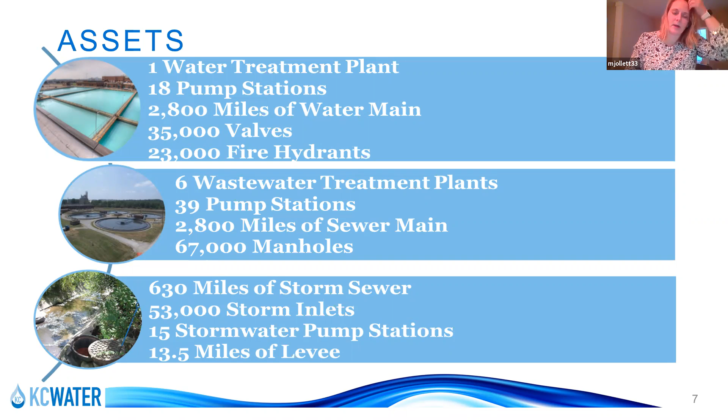I want to give a brief overview of our water main replacement program, since this project we're discussing tonight is part of it. We have more than 2,800 miles of drinking water infrastructure, and some of those pipes date back to the late 1800s, consisting of older materials like cast iron pipe. This aging infrastructure typically leads to a lot of breaks, which is a nationwide challenge most utilities are facing.

About 7 years ago, Kansas City Water implemented this water main replacement program. The goal is to replace 1% of our distribution system per year, which equates to about 28 miles replaced annually. Since the start of the program 7 years ago, we've replaced more than 200 miles. This summer in July, we replaced our 200th mile, and we've installed more pipe since then.

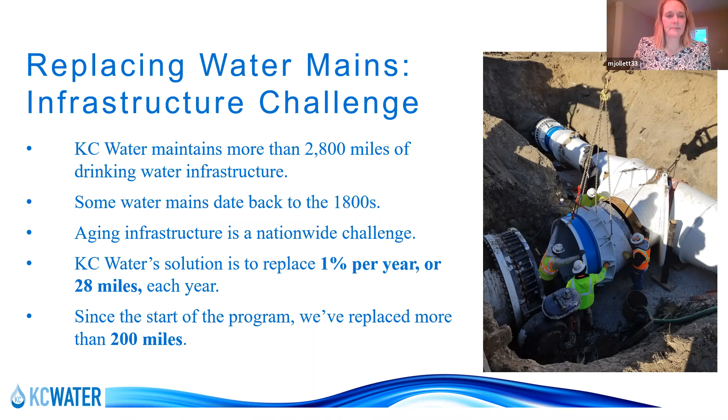So how do we choose which mains to replace throughout the city? We've developed a data-driven asset management method to evaluate our water mains and establish risks to them. Kansas City Water recently purchased software called Info Asset Planner that works with our GIS system, allowing us to evaluate the probability, likelihood, and consequence of failure. This creates a risk profile for each main.

What we do is run all the pipes through this program, excluding recently replaced ones, and calculate a risk for each pipe. The highest risk pipes make up the first 28 miles each year. This is done annually, every fiscal year, and those top 28 miles are identified as high risk mains that get developed into projects.

We also coordinate with other ongoing projects, like pavement or sewer projects elsewhere in the city, so we can tag on geographically to make sure we're only disturbing one area of the city at a time for these multiple projects.

For new projects, we design all of our new water mains to be zinc-coated ductile iron pipe, meaning they have about a 100-year design life. So the idea is that in 100 years, the new pipe should last 100 years, and we'll have replaced all of our aging infrastructure through this water main replacement program, at which point we can evaluate whether we need to renew the program.

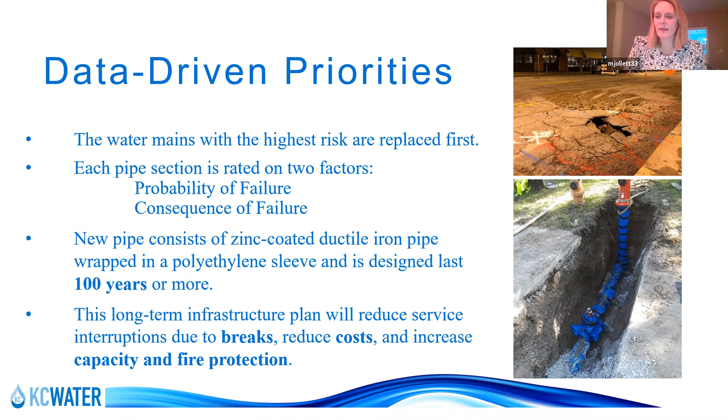And I think that's my last slide. With that, I'm going to turn this over to Terry Thomas, our project manager, and he'll go into details specifically on this project.

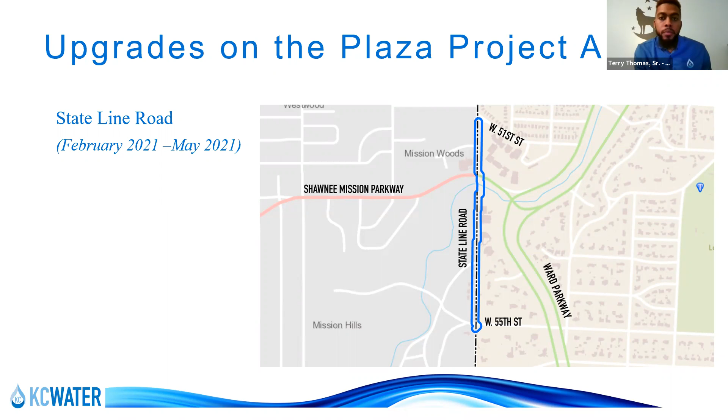But when you upgrade in size, that definitely helps out the system. It helps our customers get a little more flow because our mains have more capacity in them. Same with fire hydrants—we're putting in more fire hydrants here. This is more of a business area, so our spacing's a little tighter. Currently there's one hydrant on either end of 49th Street, and on Ward Parkway there's 3. So we're looking to bump that up to 4 there in order to make sure we get that fire coverage.

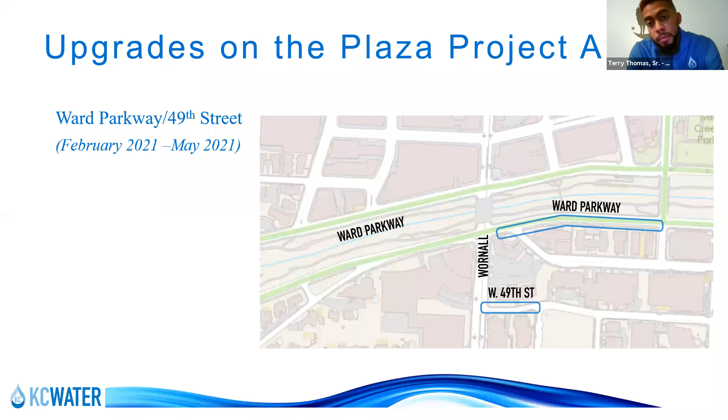Next slide, please. So once we're done with all those things on State Line and over across Brush Creek on Ward Parkway and Wornall, we're going to move on down to the main section of the Plaza. This is kind of the crux of everything—we experience a lot of breaks down here. Melanie alluded to how we come up with our projects yearly. Well, in this case, it's more of a higher profile area, something we don't want to piecemeal, because doing construction in the Plaza can be a headache, since we aren't the only ones replacing infrastructure. So we want to get in and get out. That's how we came up with saying, let's go in and replace all of our aging mains down in the Country Club Plaza area.

And here we are. You can see we covered pretty much everything from West 46th Street on down to Ward Parkway, just north of Brush Creek, and then from Mill Creek Parkway on over to Jefferson as well. So we're going to get it all done—you don't have to worry about seeing us anymore for water distribution. You may see some trucks every now and then, but it may not always be for the potable water, because we have so many assets.

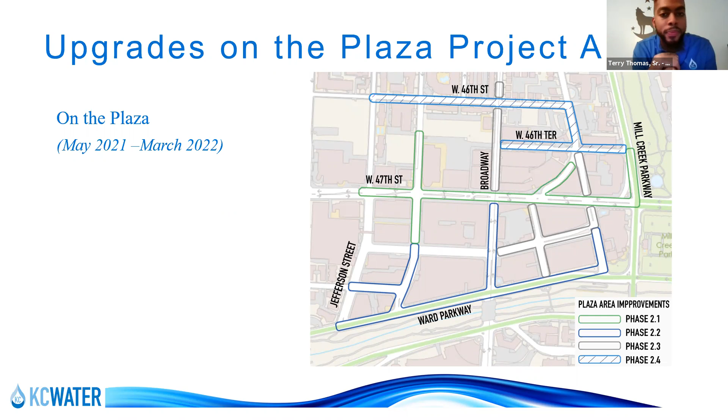Next slide. So I covered the size of the mains we're putting in here—it's going to be 4,300 linear feet of water main total in this first phase. Leith is going to get into their construction schedule shortly. Some of the things you can expect: replace all of our water valves, making sure they're operable so we can isolate mains in case of future breaks, which we're hoping is years and years down the line. We've got 100 years of life on these mains now, so we're going to make sure we keep them in tip-top shape. And of course, we'll add more fire hydrants—our fire department's always happy about that, right?

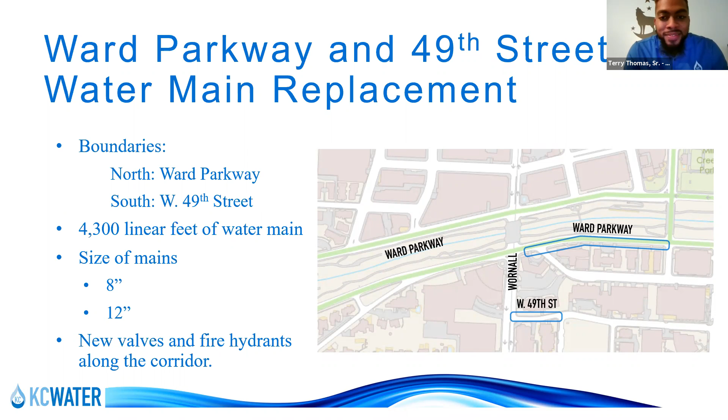And Dave, if you wouldn't mind going into the schedule, sir.

Yeah, thanks Terry. Dave Oshel here with Leaf and Sons. Just wanted to let you guys know we're looking forward to getting this project started, upgrading all the water mains in the Plaza area and on State Line. Right now the anticipated construction for these two line segments is to get started February 22nd. Already with the weather this week, that may be towards the later part of next week—we need to get some snow off the ground so we can get some locates and surveying done. But right now we're anticipating starting construction sometime next week, and activity will begin with getting locates and surveying, and then you'll see us out there saw cutting the streets.

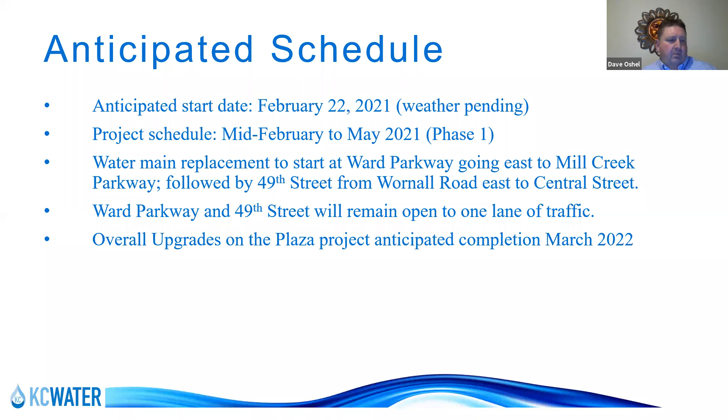These line segments here on Ward Parkway and 49th Street are part of phase 1, which is Ward Parkway, 49th Street, and then State Line from 51st to 55th. Our anticipated construction is from February 22nd, getting started and completing this first phase here in May.

The Ward Parkway work is going from West 48th Street along Ward Parkway, which is south of Brush Creek, on the eastbound Ward Parkway.

So those are the two line segments here in phase 1. We're going to be working to make sure we keep traffic open and flowing as we progress through installing these new water mains.

You'll also have flaggers out there at times to coordinate keeping traffic going through, and we're going to do our best to get in and get out as quick as we can and get everything restored.

So at some point you're wanting to know where we'll be. The anticipated schedule for the whole water upgrades on the Plaza is a completion date of March 2022.

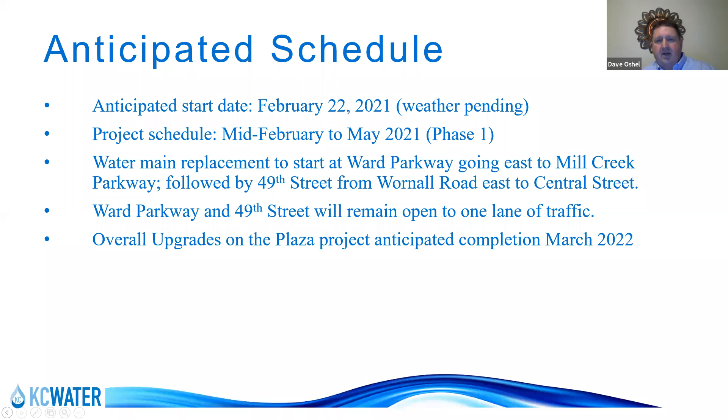All right, so now that we've shown up, what's going to happen? Dave already gave you a little bit of a rundown on how once the snow is removed from the ground, they can get some utility locates done.

That way they can get a preliminary idea of where all the other things are, like gas mains, fiber optic, things of that nature, so that construction goes a lot more smoothly.

Once that's done, in that process they'll do what they call potholing. Now, potholing is a word that scares many a driver in the Kansas and Missouri area.

But they are not creating potholes in the road to create a nuisance for you later. What they're doing is small digs just to see where everything is underground, because a little paint on the ground from locates can only show you so much, right? You've got to actually get in there and look.

Then once they do that, they'll get to constructing and placing in the new water main and the new trench.

This won't necessarily affect this particular area in terms of driveways and things of that nature, but if that were the case, if you're entering a parking garage in the area or somewhere like that, they are to work quickly to allow ingress and egress through those spaces.

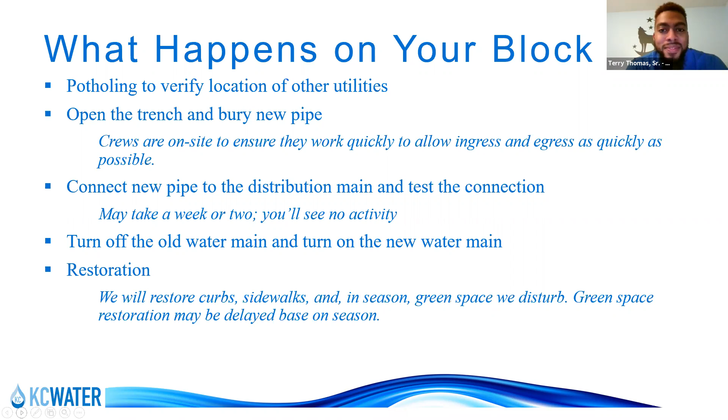During this construction, it's going to be loud. Large, heavy equipment in the area. You're going to see trucks hauling things in and out all the time. It's going to be dusty. Leith and Sons is going to do their best job to make sure that things are controlled in that respect.

Leith has a lot of experience doing our water main replacements. They've been working on the water main replacement program since its first year, so they're pretty good at doing these things.

I've already mentioned about your service interruptions. Definitely want to reiterate that you will be notified a minimum of 3 times. And if you travel, you want to plan out your travel routes during these times while they're constructing, because you may have delays going to and from work, going to the store, picking your children up, whatever it is that you do on your normal routines. You want to plan ahead and make sure that you're adding 15 to 20 minutes to make it through these areas if they're down to 1 lane of traffic.

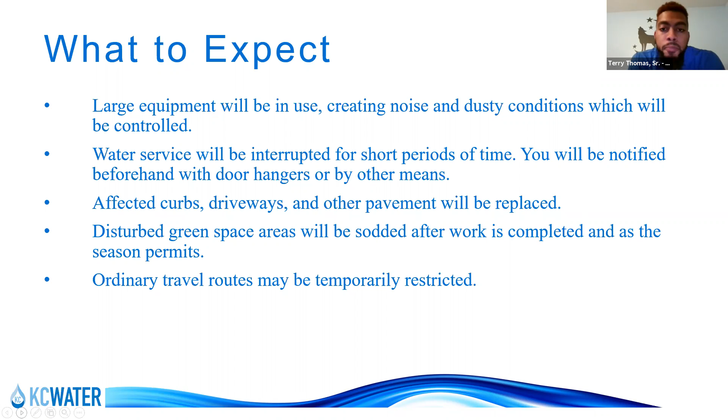Great, thank you, Terry. So now that we've talked about the work to expect and what areas we'll be working on, how do you keep yourself informed? How do we keep you up to date on what to expect in the area and the construction timeline?

So with that, we have established a project hotline, and this hotline is active. It sits on my desk. The purpose of this hotline is to allow you to reach out with any questions you may have about the project or the work that you see going on. I will monitor it 8 to 5 every day until the end of the project.

So if you have any questions regarding what you're seeing, if you need to get in contact with Terry or Dave and you're not sure how to do that, I can do that for you. I could push additional information forward to them, or I can answer your questions to the best of my ability, and of course, reach out to the rest of the project team to do so.